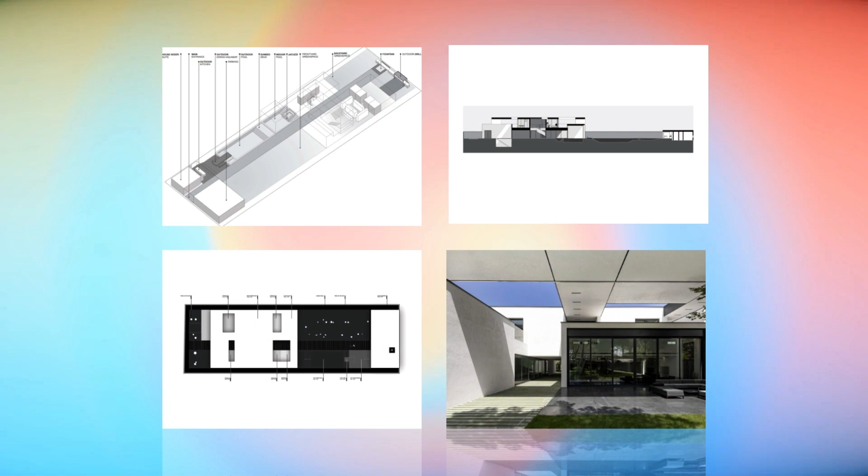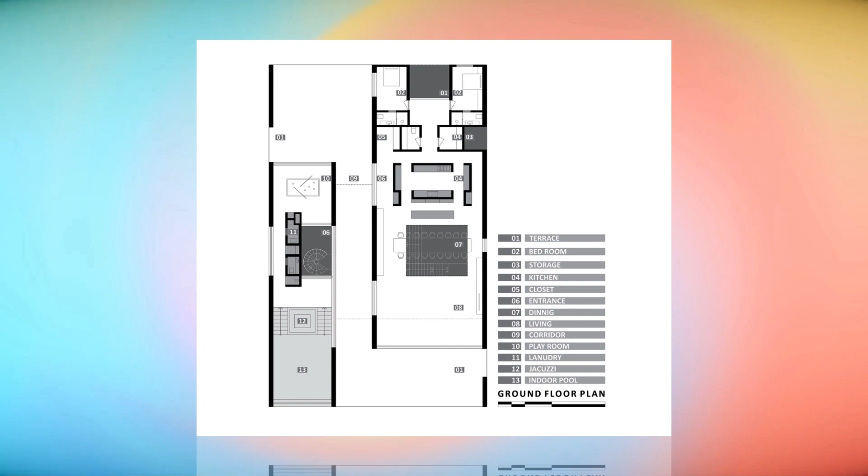The architecture of number 75 villa is derived from the subtraction of volumes. The space is formed from aggregation and subtraction of pure masses focusing on spatial experience, in which the deformed solid geometry and subtractions add up to shape a variety of voids corresponding to characteristics, demands, and designing outlooks. Voids are related to comprehension in a design that seeks to affect its users by managing the interior and exterior spaces, and forming the reality of space and a place.

The architectural form of the villa is shaped according to the void spaces, aiming at bringing them to the foreground to be perceived instead of the building's closed spaces. The perceptual and visual void spaces are formed with an emphasis on transparency and permeability. A vacuity forms in the mass and is amplified by utilizing materials.

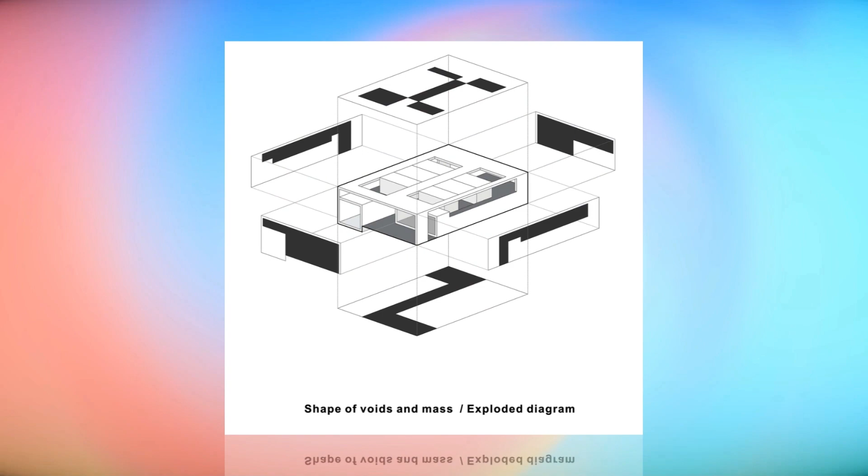In the number 75 villa, what is in the foreground is transparency and not the form. The positioning of spaces is one of the main and important reasons for creating such voids, trying to vanish the interval between inside and outside and turn nature and seasonal changes into a spectacular experience of a building.

In number 75 villa, void spaces tremendously strengthen the functional clusters with subtraction in form and create the basis for performing practical activities with different titles such as entrance, corner, balcony, vestibule, and yard.

The spaces are connected on several levels in this villa. The expansion of the opening in the ceiling and its extension to the floors beneath, and their impact on creating spaces parallel to each other and frames that change the direction of vision, will result in an experience of the future and different moments. Deep shadows are created with a combination of a broad ceiling and terrace spaces that frame the sky, for a delight for the eye and to protect residents of the villa from harsh sunlight.

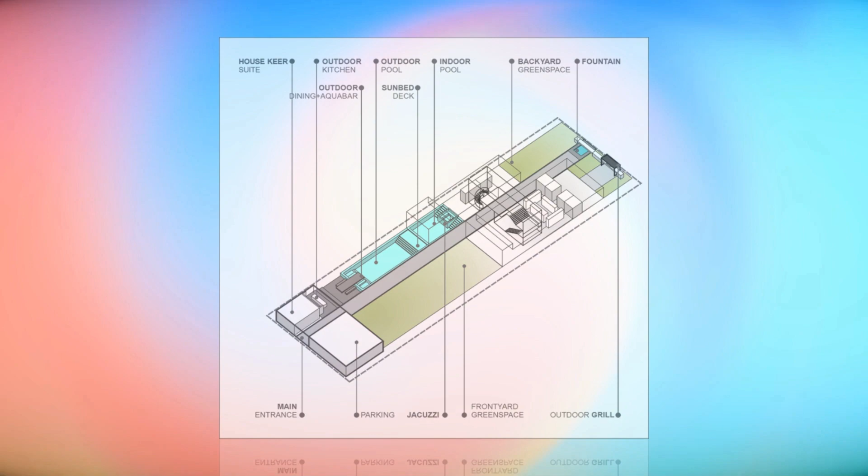The site orientation is in the north-south direction, and the building is oriented the same way to make the most out of the light and landscape of the site and save the trees in it.

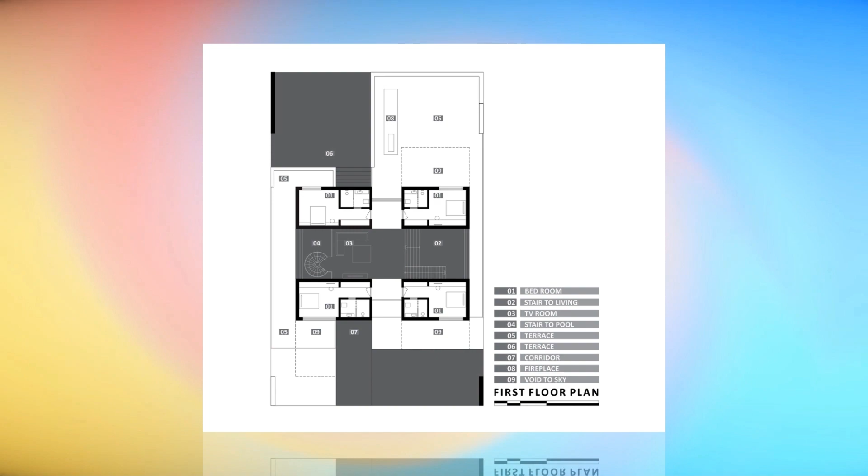The numerous and very compact functions of the project strengthen moving toward creating porosity and shaping up the design process, based on the definition of vacuum spaces, and thus various public and private terraces are formed in the project.

As soon as you enter the villa, there are buildings shaped by gabion walls. These buildings form the entrance, the caretaker's villa, the open-air kitchen, and the covered parking in combination with the walls of the site. The harmony between material and construction is vital in this part of the design.

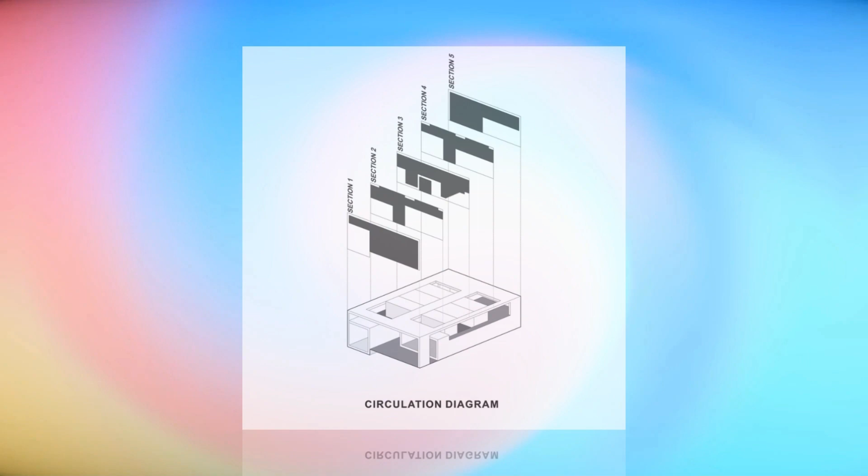The physical program of the project includes a hall, dining room, and kitchen in addition to guest rooms in the eastern volumes of the mass, and sport and game spaces in the western volumes of the mass. A total of 4 bedrooms are located above the lower masses and on the second floor with an east-to-west orientation. They are connected to the lower volumes with 2 vertical connections.